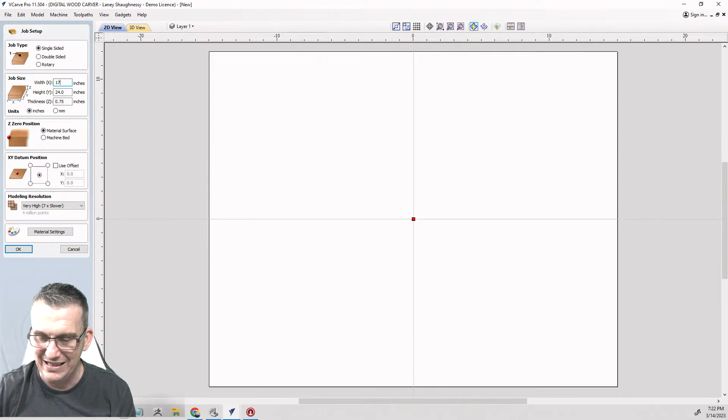Let me get down there—I'm in VCarve Pro tonight. So tonight we're going to create a project. I'm just going to set up a project that's about 17.5 inches wide, 24 inches tall, 3/4 of an inch thick. I'm going to be referencing off the material surface, and I'm going to be starting in the center—usually I start from the bottom left corner, but I'll work from center tonight.

Now when I click OK, I'm going to come in here very quickly, and let's say we have this—let's say we have... bear with me just a moment.

So the first thing I want to do is take these two objects and this object and center them, align them up and down. Oops, let's try that again—hold the shift key when selecting more than one object, get those centered up and down. I want to get this object centered with this up and down, and then weld those two shapes together, and let's weld that together as well. All right, so very rough drawing here.

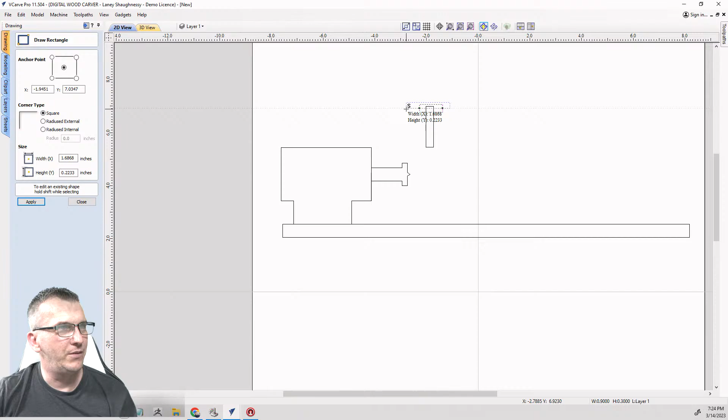But let's say that your router—let me do this. Here's our bit inside of a collet, inside of a router. Close that, pull that up, select all three, align left to right, center, and group. All right, you don't need that—we'll talk about drawing and stuff here in just a moment, but let me just say this.

Let's say the bit here—if I get this bit perfectly aligned with my center point and zero out my Z there, whether I'm coming in from the side or the top, wherever your router's positioned—if I get that tip of the bit referenced with that live center before I put a piece of stock in, then if I have a particular place I can touch off that's a relative distance from that, in this case we'd want to be in the up position, touching somewhere up here.

So if I was coming in from the top, if I come over and touch off on this position here, that vertical distance from this point to this point, that is my offset.

When I'm touching off on my fixed point, it might be tough to have the bit touch off to the outside of the live center if your stock is quite wide. We can do up to 8-inch diameter stock, and a lot of your bits aren't that long, so reaching that live center to program in that distance from that point to that center, that radius, if you will.

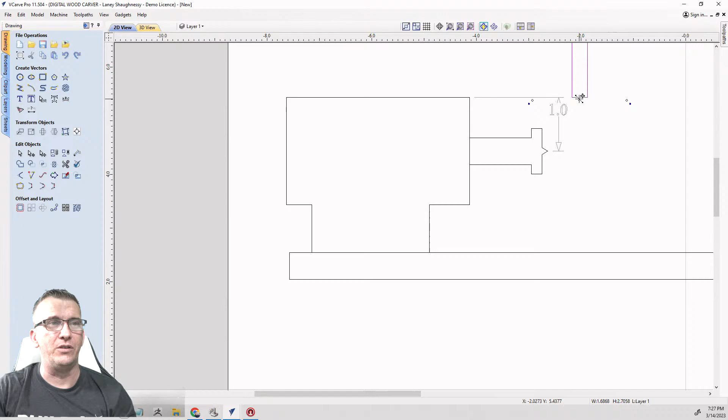So that way, if I were to take my Z over to a clear spot and type in Z0 to move that to the 0 position, I would come down to that 0 position, and then I would be in line with that tip.

Hopefully that little illustration helped out a little bit. All right, let's get back over here and get rid of that. And the same thing if you're coming into the side.

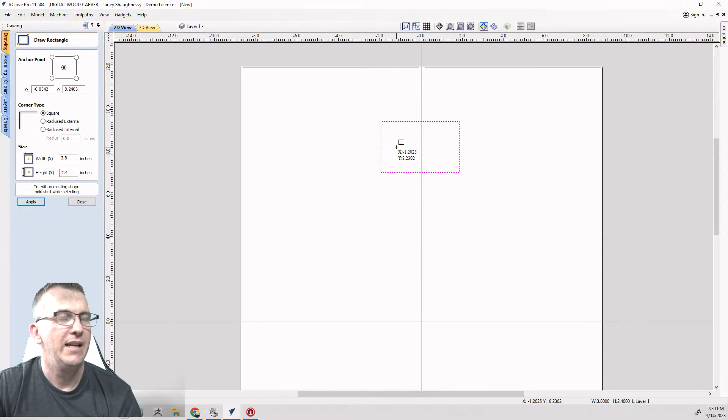So let's get started with the most decorative part of the design at the top of the frame, in this general area here. That square has nothing to do with anything right now, but there's going to be a lotus flower—just a 2D kind of lotus flower. So that's what we're going to start off with, and then we'll build around that. And then we'll pause and take questions and stuff like that as well.

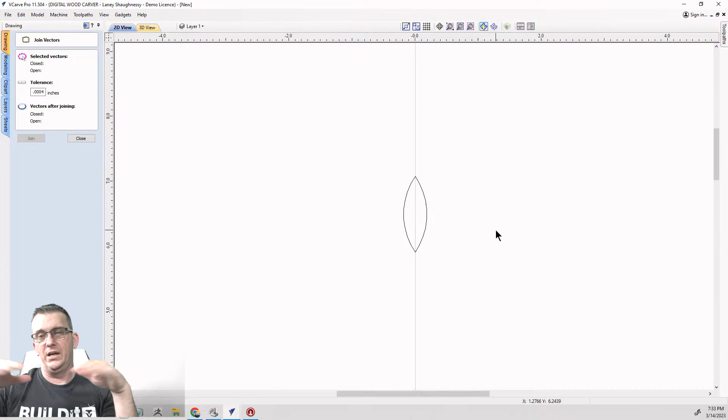Transformational matrix is great for sign makers and stuff, especially vinyl cutters. If I have a metal backboard with some vinyl on there, and I have some reference points, I can bring my camera over on my CNC and identify those reference points, turn on transformational matrix, and it'll adjust the design to those reference points, just like a vinyl cutter. So I can carve out that sign perfectly around that vinyl sticker with transformational matrix.

Warp, if you're probing, you can warp the design onto and carve on twisted, bowed, curved projects, uneven surfaces. Skateboards are a great reference of warping. People who make custom skateboards have curves on their sides, and you need those carvings to follow those curves, so you can probe those points out and warp them. There's a lot of stuff packed inside Planet CNC TNG.

As far as the digital wood carver customers, I don't know anyone using it to its fullest ability. But hey, if you want to be a pioneer and be the first, go for it.

Brooks Martin, yes, it's usable on all CNCs. Planet CNC software comes with a control board, so you would take out your current control board and install this one. Hook up all your axes, limit switches, and all that stuff and controls to that control board, and your inputs and outputs. Then you can run Planet CNC.

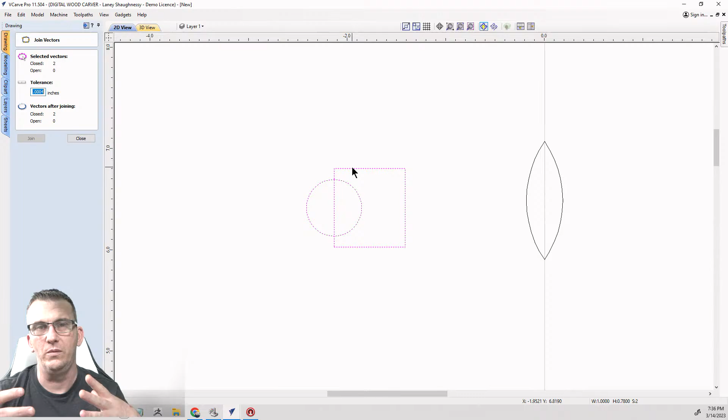There's no way to physically join with the join tool. I have to join by using one of the other options for trimming, to trim and everything. So my weld tool, on the other hand, takes two parts, gets rid of all the center stuff, and just keeps the outside of the shape.

So if I weld those two parts, that's the weld, right? It gets rid of all the center. It's just like welding two pieces of metal together to create a brand new shape, a brand new part. So we have two shapes that when we weld them together creates this one new shape.

Now joining is not going to let me join two shapes together. Joining is mostly used for when I have a vector. Let's go to node editing, and I cut this vector, and I have a vector that's open. Whether that vector is open with the nodes close together, further apart, or whatever, I've got my join tools.

I can join or close this by bringing the two endpoints to a common point of intersection. So that would look something like this, which distorts the rectangle, right? It brings the two points together to a common point of intersection. I could join these two parts with a smooth curve. So instead of a straight line like it should be, it joins with a smooth curve and closes that off.

Or I could join this with a straight line. So this shape here on the board, if I join it with a straight line, of course, that's going to join and close it with a straight line.

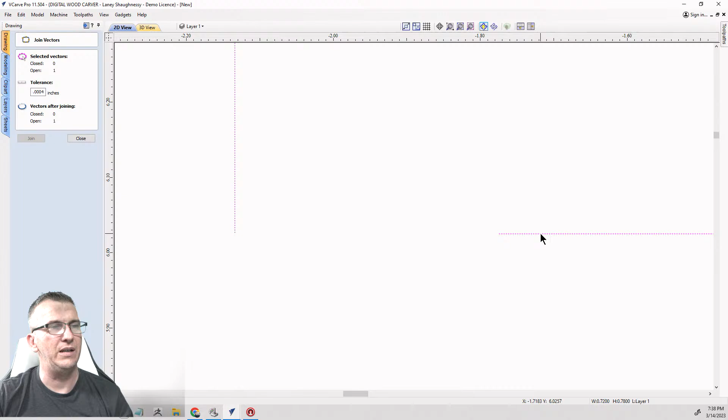If I am using the join tool here, my tolerance, my nodes and everything, they have to be well within my tolerance range. If I am here within this range, that's still too wide because I need to be within 0.0004 of an inch. If my lines were just cut but the nodes were kind of on top of each other, I could come in with the join tool, and that will allow me to join or close. Now I could change my tolerance, make it larger, but then that's going to distort my design. So 0.0004 is where you want to be.

And if I just cut this vector with node editing right there, not in the center, but right there, so this looks like it's together, but it's an open vector, okay? The vector is open, but I can join, because within my tolerance, that open vector, I can click the join button and close that. That's joining.

Now, where most people get confused is the difference between joining and grouping, not joining and welding, because that's two completely different beasts. When we're welding two parts, we're taking two shapes and creating one. But if I were to group these objects together, that means when I click on them, they are being treated in the software as one item.

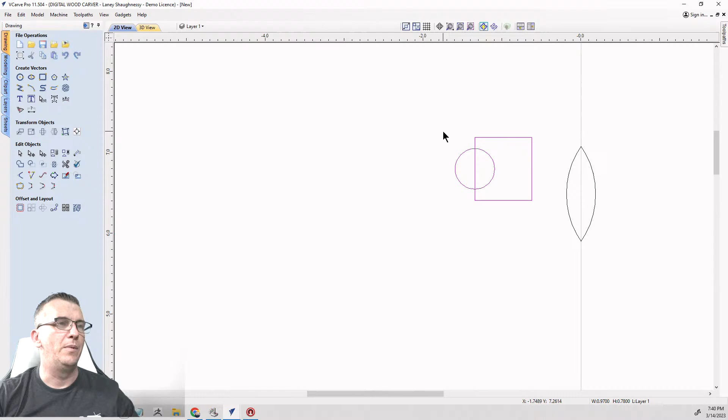But if I were to join them, I could use my scissor tools, right, let me get them ungrouped. If I were to join them, like welding, I could trim those together in one direction or the other, doesn't matter. But grouping doesn't join, welding doesn't join, join joins. Join is for taking an open vector and closing those nodes up, joining them together to create a closed vector.

So hopefully that was clear. I hope that answers your question. It was a confusing answer, but hopefully it was a good one.

All right, let's talk about our lotus leaf here. Here's what we got to do. So the first thing that we're going to do is we need to create the petals for this lotus leaf. And we have to determine how far apart the spacing we want for the next petal, the next petal, kind of thing.

And I think what I'm going to do here is I'm going to do an offset. I'm going to go outward, and I'm going to offset a distance of 1/8 of an inch, and create... all right, 1/8 is too much for this. Let's go with 0.06 instead.

Oh, that was 0.6. Hold on a second, ladies and gentlemen. I can't type tonight.

0.0625. Here we go. All right, perfect. Okay, actually I want to go closer, I want to go 0.04. Control Z to undo, we're going to settle on 0.04. Beautiful, that looks good to me, because I want my petals to still be somewhat close.

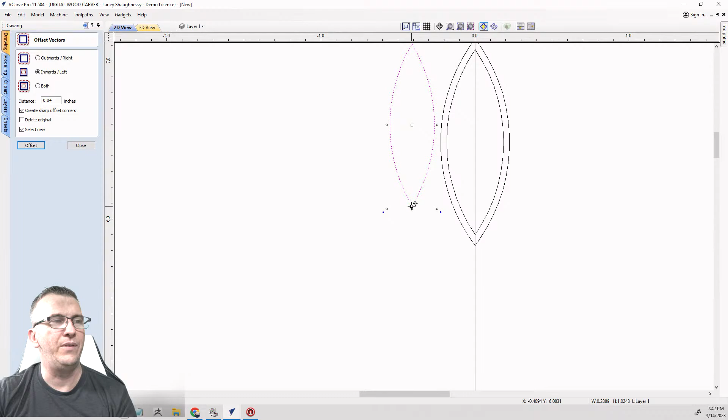But I'm also going to offset inward that 0.04 as well. Now that inward vector, I'm going to take it, and the end of that vector is going to come right about here, just a little up from the bottom. It can be anywhere, but it's on the offset. I'm on the offset vector, and I'm deciding to choose, I'm picking just a little bit above the tip of my original...

Part. My original piece is this piece. I'm just going a little bit higher. But I want this point, I want to grab this point and snap it to that offset. And then, if you single click when you're double clicked on an object, let me show you this.

Let's say I have this rectangle here. When I double click on any object, it puts it in transform mode. Transform mode means I can move, size, rotate, mirror copy, and all that stuff.

Now, that middle square is not just for moving things around, grabbing and moving, because to move an object you have to either grab it on the pink line somewhere or the middle square. But if you single click on that middle square, that is also the pivot point. By default, all parts rotate on themselves when they're rotating, and the pivot point can be moved, so I can single click on that square and it'll show the pivot point. And then I can drag that pivot point anywhere I want to, so that I'm rotating off that pivot point. Okay?

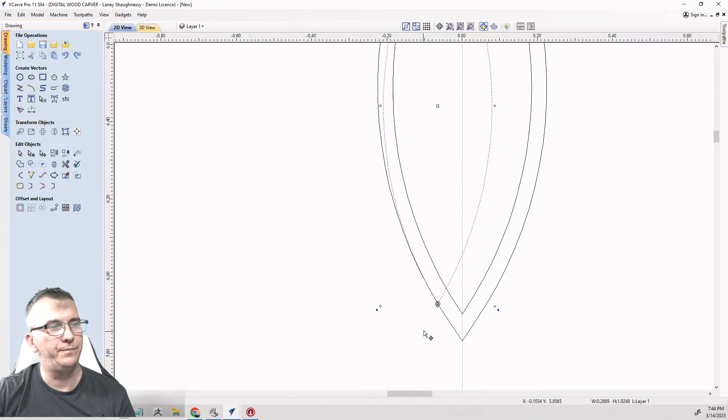So what we're going to do with our lotus petal here is, let me get rid of that, on this offset that we moved over here and kissed up to that edge, I'm going to double click on it to put it in transform mode, and single click on that center point to get the pivot point. Then I'm going to drag that pivot point down to the point here. I want to be down on that point, because I want to pivot off that point, and I'm going to grab this blue corner box here, and I want to rotate out.

And when I rotate out, I want this edge of the lotus to touch the edge of my original part. So I want to come over and bring that out to just about there. I want that touching, kind of close enough.

I want that touching. All right, now I'm going to take that petal and mirror copy it. Flipping, create a mirrored copy, flip about job center is also checked, and I want to flip horizontally to create the other side.

All right, and then I'm going to take both of these objects here, and I'm going to offset them outward by that 0.04. That 0.04 is going to stay consistent throughout. I'm going to go outward, but I should go both directions - I should just choose both directions next time, but I'm going to go inward as well too. The next one I'll do both directions because I want to do that offset inward and outward.

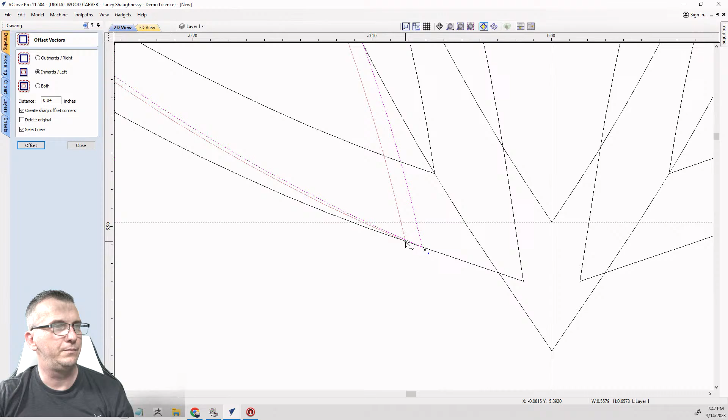This is my original part right here. I'm coming back down a little bit, and I'm actually going to be lower than my original part. I don't really want to be that low though. Let me put a line there. I want to be lower, but not that low, so let's come up just a little bit. There, okay, and pull that up.

We're going to take this and once again click on the pivot point at the center, drag it down to that point at the bottom, and then we're going to rotate this out. I want this shape touching my second petal, that petal there. Let me get back over there, and I want to rotate just a little bit more.

Okay, and then I'm going to take that object and mirror it to the other side. Okay, we're going to stop there for a minute so we can answer another question.

Brooks Martin asked, Laney, does VCarve or Aspire have a way to equally divide a vector into 5 equal segments? So I'll show you my approach, Brooks, and then you can kind of go from there.

So if we do a line, then I'll also do a rectangle and show you kind of the two ways I would do it. Let's say I have a line here, and let's say I have a line here. And let's say that I take that line and hold down the control key, and I'm going to just drag out 5 copies of that line, right?

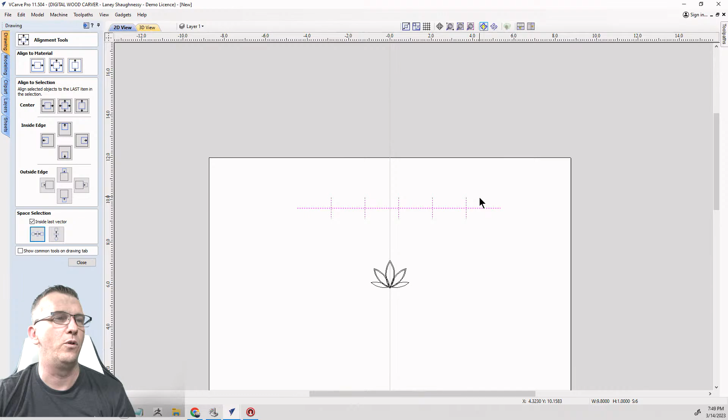If I wanted to separate into 5 segments, then I would only use 4 lines, right? So I could take those 4 lines, select them first, this line last, center, and then space equal distance to create my 5 individual segments, right? And then if I needed to cut them, I could cut them on those lines. So that's one way if it was a single kind of vector thing and you needed to divide it up into sections.

Now let's do it as a shape. Let's say that I have a rectangle here. And on this rectangle, the size of this rectangle is... let me stretch this out so everybody can see. All right, let's size this up. I'm going to go 17 by, we'll go 2.5. Just a random number, nothing major. 17.5. I want to kind of be the same size as my board. There we go, all right.

So let's say that I wanted this 17.5 of my board divided into 5 sections, right? I could come into the rectangle tool here and take my width, and I'm either going to use the number if it's not the same width as my board, but if it is the same width as my board, then I'm going to use the letter W or the letter X. So in this case, I'll use the letter W, and I'm going to divide that by 5 and hit equals, and that gives me a 3.5 inch.

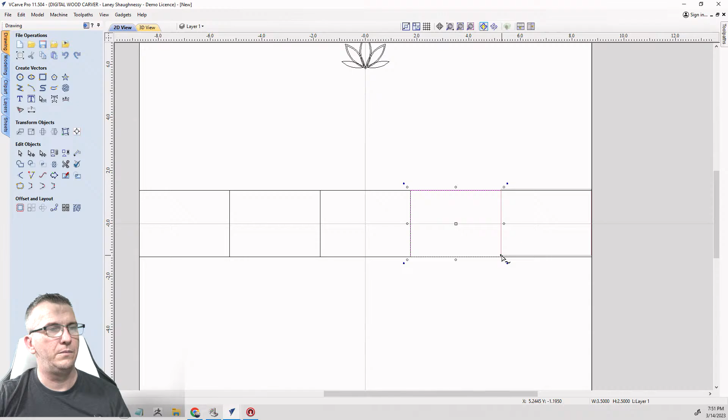Now I'm going to go ahead and come over here and just click this. And basically what I have just created is 1/5 of this rectangle. So if I hold down the control key, I can drag out copies and snap my second one into place. My third one, snap it, get my snapping tool working on me. My fourth one, and my 5th one. Let me get everything snapped together. There we go, and so I could divide it up that way as well too.

So that would be, Brooks Martin, that would be kind of the ways that I would equally divide a vector into however many sections I would need. That's the 2 ways, my 2 approaches.

So now, again, if this rectangle was not the same width as my board, let's say it was in here, still, it doesn't matter. I'm going to be creating a rectangle that's the size of my board, which in this case is 10.4544, whatever. I'm going to divide that by 5, hit equals, and then I'm going to click to create that 1/5 of that segment.

And then I'm going to just hold down the control key and just, 1, 2, 3, 4, 5. And again, I'll take all those and line them up and down so they're all lined. But that would be a way that I would do that.

JR asks: does Planet CNC support automation and importing variable tags, like designing a 10 inch by 3 1/4 inch circle, and can I run a macro subroutine Excel file too? I have no clue, JR. You'll have to research Planet CNC on that one. I don't even know why Excel would play a role in anything, but I'm sure that's a Mach 3 thing, or something other controllers do, some old school way of writing a macro. You'd have to research planet-cnc.com. I don't have a way to answer that at all. I'm not even going to attempt it. It's a good question, but a little over my head.

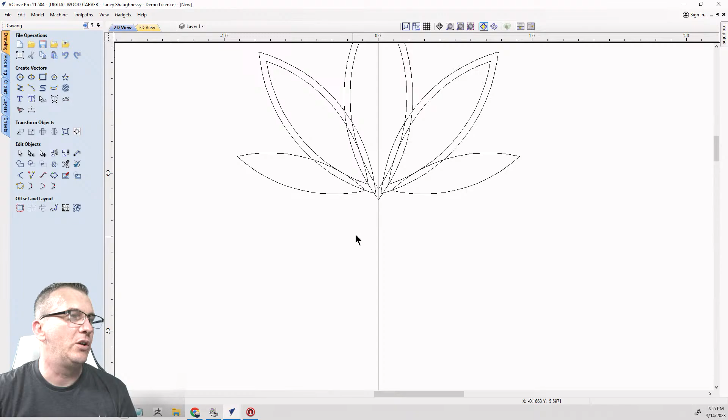We had just mirrored our two parts over, and now we're going to offset those like before, outward and inward in both directions. We'll use that time to go ahead and create those two shapes again. I'll take the right one, since I'm going to mirror it over when I get into position, so I'll delete the right one. On the left one, I'm going to bring down the offset, and I want it to be somewhat close to in line with the other part here.

This time, on this last petal, when I create the mirrored copy and rotate it, I'm going to rotate it almost straight across. I want it straight across, pretty much like that, and I'll be happier if I can bring this side down and snap it to that outside edge.

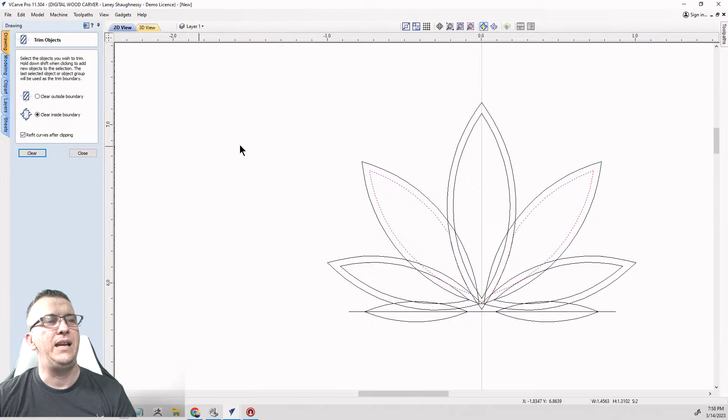That's going to be my boundary, and I'm going to use the regular trim tool, and I want to trim clearing inside the boundary. So we're going to get rid of that. And then once I've done that, I can delete that boundary. So we'll delete that boundary.

Now, next petals. Down here, we'll select these two, group them together, G for group. We're going to select the two offsets, G for group, so two separate groups. Let me see if I grouped the right ones. I did. We're going to select our petal group here, hold down the shift key, select our offset group last, and clear inside the boundary. Once we've done that, we can then delete that group.

And then finally, we're going to take this shape here and this shape here. We're going to group those together. Select our two offsets. Group them together. And they don't necessarily need to be grouped because they are together as one.

So we will select our first group here, select our outside offsets and trim, clearing inside the boundary. And then once we've done that, we're going to take our scissors and, well, first of all, let's get rid of the offset. Okay. Then we're going to take our scissors and we're going to trim away our line at the top here and the bottom. Okay, just like that. And that will be our lotus flower.

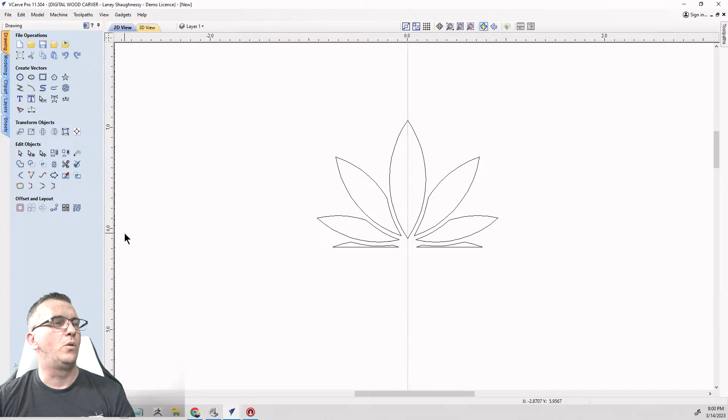And then we're going to take and offset that entire flower to create just a big boundary around it. And I think I'm going to offset it outward. I think I'm going to go 1/4 of an inch, or let me see what 1/4 of an inch looks like because it's kind of small. 1/4 of an inch is way too much. That is not what we're doing. Let's go with a 0.125. Let's see here.

Nope. All right, turn off sharp corners. We don't want sharp corners. I kept seeing what are those points. We're going to go a 0.8... 0.08. Laney, learn how to type tonight. There we go. Offset. Perfect. 0.08. That'll be our offset.

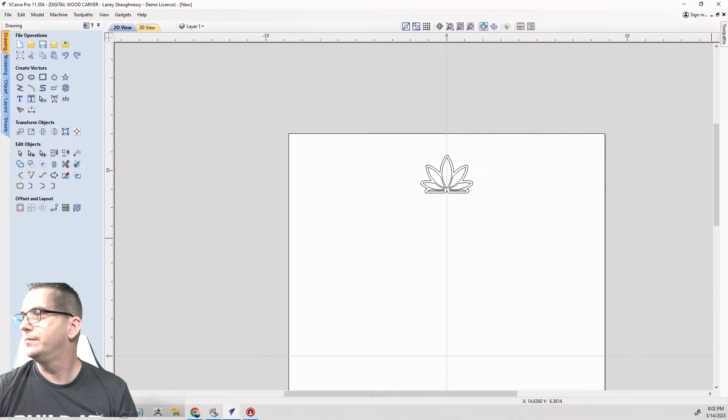Let's close that. So now we have our lotus flower here. And I'm going to go ahead and drag that up to the top here. Okay. And that's going to be kind of an accent piece at the top. We'll size it up. We'll go a little bit bigger. Not much, but though. Size it up. And we're going to create a mirror copy all the way around, so we don't need to do anything with that anymore from there. All right. Bear with me a second.

All right. Now, the next thing that we're going to do is we're going to now kind of start out with a rectangle, if you will. And I always, a lot of my shapes, just so you know, and you'll see this if you ever watched my class video... I think it was live. But how to draw a Maltese cross. That uses guidelines and rectangles to create this Maltese firefighter cross and everything from just those rectangles and other shapes. But if you ever see that, you'll kind of see my approach and stuff.

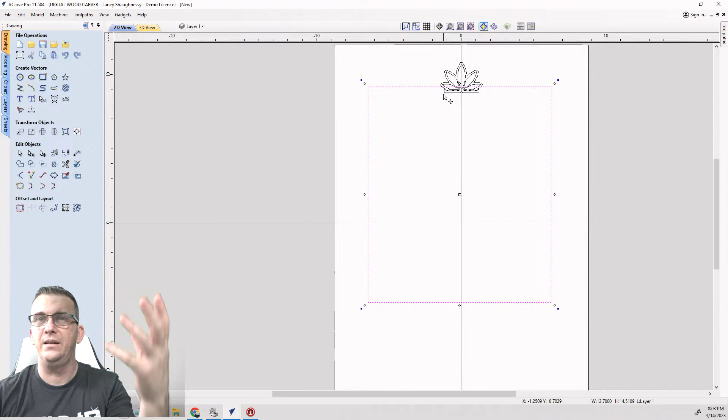But this time, what I'm going to do is I'm going to draw kind of a full rectangle, almost like it's my full frame. Now, mind you, I'm only going to be focusing kind of on that top left quadrant. I don't really care what's on the right side or any of that stuff. I'm kind of going to be focusing my attention here. And in this case, the center of my board is going to be my center point, if you will. So anything below that center line, I'm not paying attention to it either. So basically from that center line up is my focus point, my focal point and everything. Okay, so what I want to do is let's go ahead and let's bring this out some.

I want to make sure it's centered left to right. So I'll go to the alignment tool and align to material, left to right. And I'm going to go right into node editing mode here on this.

What I'm looking for is I want to create kind of an S curve, a nice French curve, if you will. This Victorian frame is what we're ending up making, but I want this kind of French curve shape to it.

So I'd like to go into node editing, and the first thing I want to do is go with a fillet first. I'm going to go with a large fillet, like a 2-inch normal fillet, and round that over. Actually, I want to go bigger than that. Let's try that. Okay, that'll work.

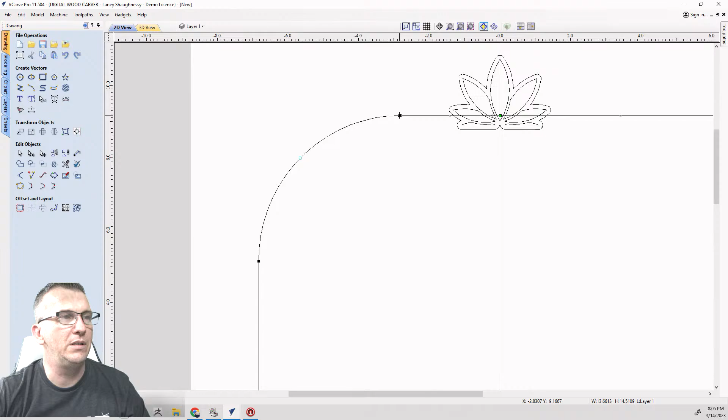I just want to go from point A to B for right now. I'm going to delete this point, and you can see I'm getting more of a curve here because it's still an arc.

I'm going to change it to a Bezier curve now, and this will let me manipulate this curve a little bit to really flow it out.

And I want to create a cut on the vector right here. That's not quite my center line. Let's get it right on the center line here.

Okay, and now that I have this Bezier curve, I need to get rid of this point. So again, point A to B, let's delete that point.

Now I have this curve that I can work with, and I can really start to create the shape. Now I want this anchor point here that I cut. I'm going to use the down arrow. I'm a big fan of using, instead of the mouse, the down arrows, up arrows, left and right.

I want to pull this down to right about here, and there's going to be kind of a cutoff point over here, but this will be good. I want to pull this arc, and I don't care right now about it crossing over the lotus, because again, there's going to be a cutoff point in just a moment.

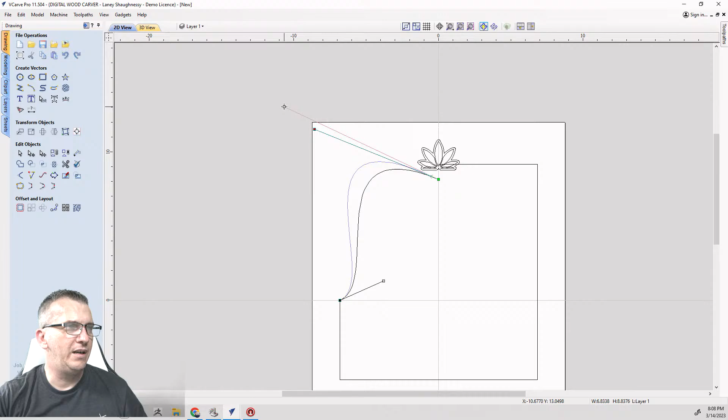And then I want it to kind of S around to about like this. All right, so on this shape.

And then what I want to do is offset that. So I want to offset outward.

Very important, so you know this: imagine this star is you. That star is you, and you imagine you are looking at this line right here. That start point, wherever your start point is, imagine you are looking at that start point. Your left and your right is the same as the left side of the line or the right side of the line, inside or outside. So if you are here staring at this starting point, this is the left side of the line, this is the right side of the line. This is the left, inside. This is the right, outside.

Now, if I took and put you here, right, and you were looking at the start point here, this is your left, this is your right. Right, left, right?

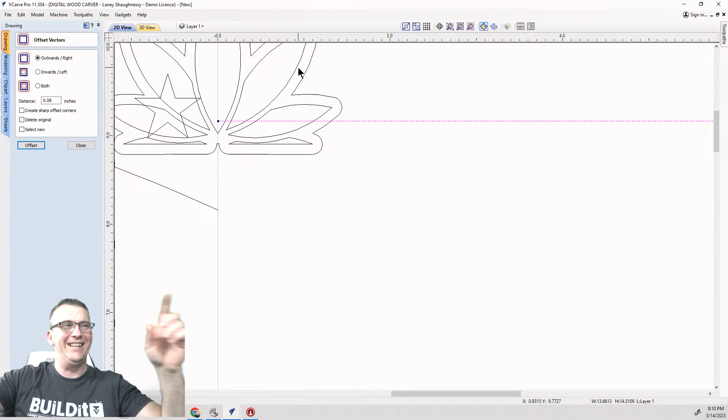So if I'm looking at the line in front of me here, the start point, my left, my right - this would be the right outside, this would be the left inside. Even though you think no matter how I look at it, that's still the outside, right? No, it's just where the start point is.

So if I were to offset this line outside right, it's going to create that new line here. Let me do select new so you can see, and I'll go bigger, 0.125. Offset outside right, it's offsetting inward.

So inside left goes outward because of where the start point is. Now, if my start point would have been at the end here, then it would have been correct - outside right, inside left. Because if my start point would have been down there, remember, it's wherever you're standing looking at that line. If this is the start point, make start point, delete that, delete this - that's the start point. Now if I go offset outside right, it's going to go outward like it's supposed to, and then inside left, because that's your left, this is your right if you're standing there looking at the line.

A lot of people get confused on that, and I just want to make sure that you don't, okay? All right, so hopefully that was helpful.

Who knows? Who knows? All right, Kool-Aid. Thanks, bro. Man, I appreciate you, buddy. Thank you, Kool-Aid. Get some Kool-Aid. Awesome.

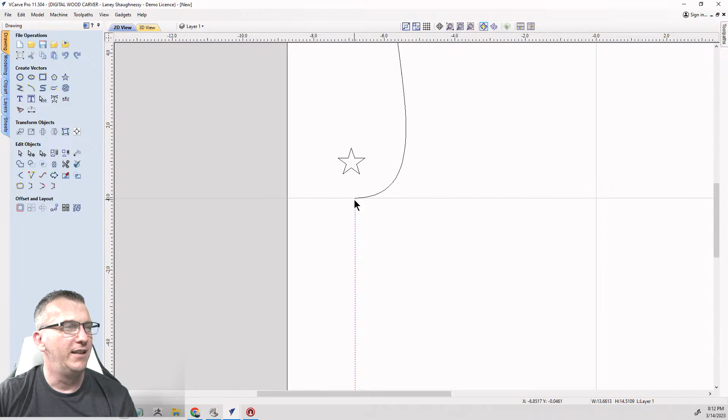Those super chats keep coming in. Where we going? If each one of my subscribers donated $1, we'd be somewhere.

All right, let's see here. Let's get rid of the star, that's not part of the design. So this shape here, I want to offset it. And my start point is here, so I want to offset to the right outside.

And I'm going to offset outside, and I'm going to go about a 1/4 inch, let me see what that looks like. Yep, 1/4 inch is good. We're going to go 1/4 inch. Let's go a little bit more, control Z, 3/8. Let's go 3/8. Now, 0.375. And again, there's going to be a cutoff point here in just a moment.

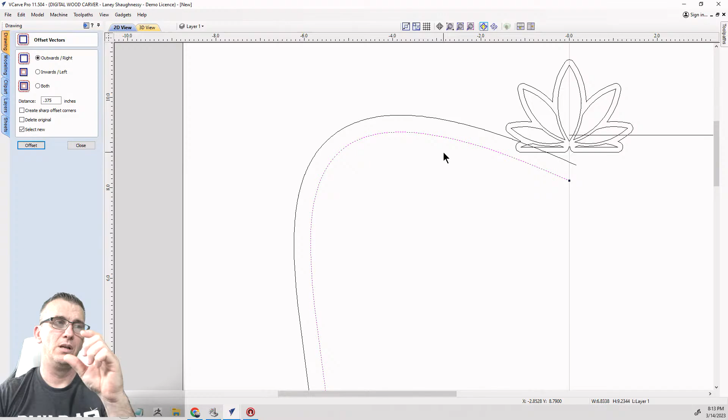Now, the next offset that I do is I'm going to do an offset of this line here a certain amount, and it's going to be wider. And then I'm going to do an offset of this line going the outside way, and it's going to be closer. So let's do this one first, the inside.

So we're going to go, and again, if we look at the node editing on this line, the start point is eluding me. What is the start point? Let me delete that. All right, so the start point is still this line right there, that's still that green line. It's still that one. And if you look at the arrow, can you see that? It's hard to see on the screen, but if you ever look next to the node at the beginning or the end of the line, there'll be an arrowhead, and that arrow points to the direction the line is traveling, start to end. Okay, so this is my start point.

So again, on that one, I need to offset inward, and this one's going to be a wider offset. I'm going to probably go 3/8 inward. Okay, I'm going to probably go 3/8 inward - no, I'm going to actually go more. I'm going to go offset inward, I'm going to go half, we'll just increment it up, 0.5.

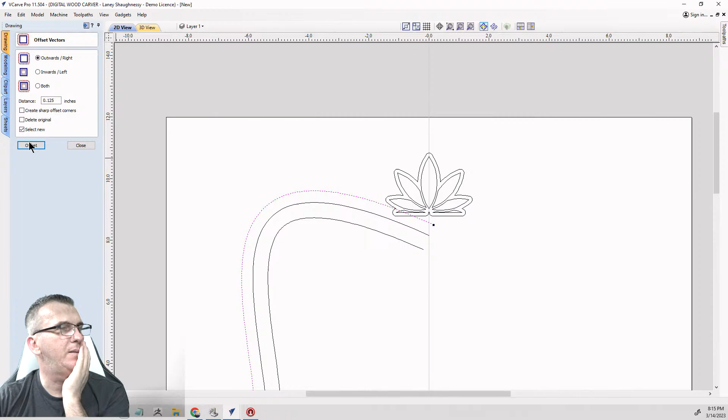Yeah, I'm happy with that. Okay, I'm good with that.

Now we're going to take the rectangle tool, and on my offsets, let's pick a spot anywhere. Let's go here, and I'll center it up in just a moment. With this rectangle, let me get it centered, align left to right on the material, and let's bring this in to right there. I want this edge to be touching right there on that bottom line.

That's good. Now, on this, the outside offset of the lotus and this line here, let me bring this out just a little bit past that line. They're going to kind of all be welded or trimmed together in just a moment, but before we do that, let's get some of this cleaned up so you can start getting a better visual.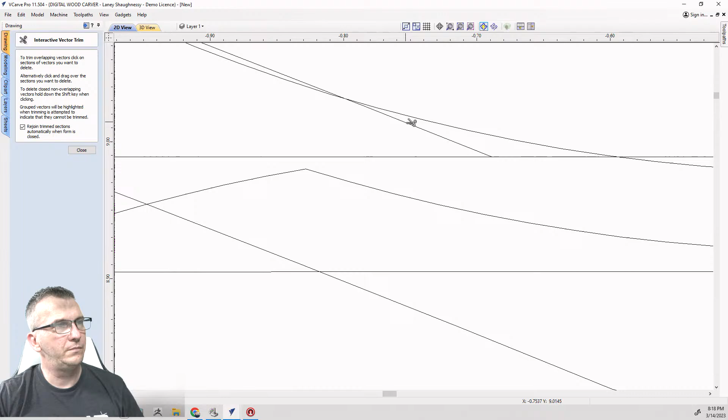So what I'm going to do is take the scissors, and this arc right here, I'm going to trim away that arc, get rid of it, all the little pieces of it. Okay, and then I'm going to trim away this part of that border where the lotus connects right there.

I'm not going to trim anymore right now at this time. I'm going to leave that be, because eventually, in just a moment, I'm going to be drawing a line and cutting everything in half, because remember, we're only doing one quadrant.

Now, from here, I can go ahead and trim that line away. I don't need that anymore either. All right, good. Now, this rectangle, let's bring that down to right about there.

What I want to do, ouch, got something biting me. What I want to do is on the rectangle, the two sides are going to be gone, and I'm only going to have the top and bottom lines. The top line is really going to be, let me bring this up here, just nothing.

Basically, hell, I'm probably just better off. Let me just draw a line, and let's get rid of the rectangle. I'm just going to draw a line because we're going to be getting rid of the two sides and the top. So what does that leave? Just the bottom, right? So let's pick a spot right over here.

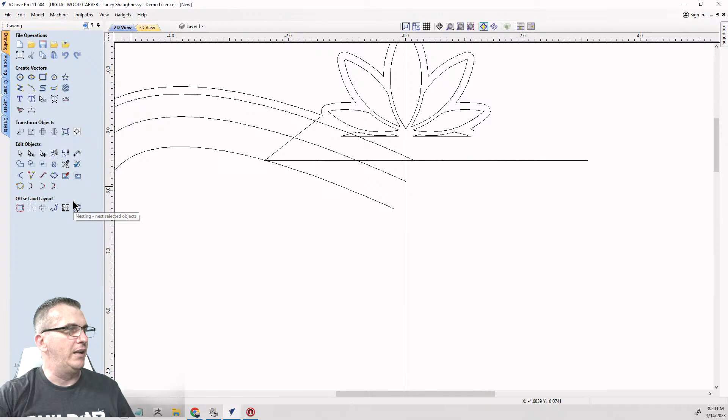And what I want to do is imagine, if you will, that there's a virtual line, and I can draw it actually in there. Let's just draw, we'll trim a line from here to this point, there to there. Now, that line, I'll use it as a trimming line. I'm going to trim here, here, here, and there.

Yep, that's good. And then I can get rid of that little segment. So basically, it's been used right now just to trim this off, and then I can now trim this to there. So there is, so far, kind of the frame or where we're at.

All right. Now, on this, I'm actually going to change the curvature just a little bit. I'm going to kind of manipulate it with node editing. And, no, I'm not. I'm going to... No, I'm good with that.

I'm going to draw another rectangle. This time it's going to be a very thin rectangle. There's going to be a top and a bottom, and we're going to kind of overlap this. The height of it really doesn't matter to me; I just want a nice thin line, right under these kind of flat petals of this lotus.

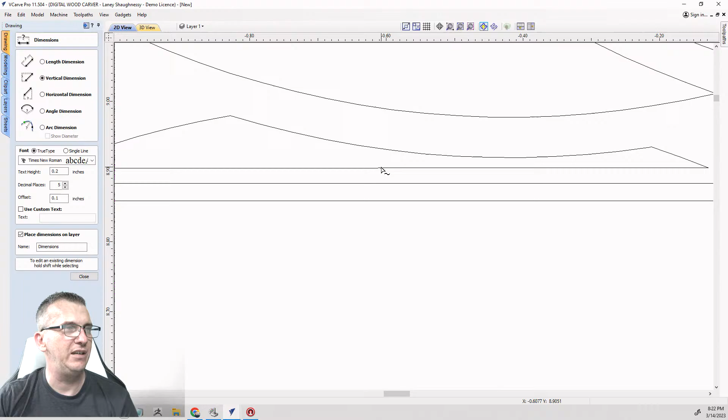I'm going to measure from here to here vertically, and I'm about 0.02193. Well, if I were to measure up here, okay, I'm at 0.04305.

So if I take this object right here and move it relative on the y, up and down, if I take the distance I'm at right now, 0.04305, and subtract what I want to be at, minus 0.02193, and hit equals, that's the distance I need to move. But I need to move down, so it's got to be a negative number, so I'll put a minus sign in front, and then click apply to bump that down.

So now, when I measure from here to here, I'm at that 0.02193, right? You take your current distance that you're at minus what you're trying to achieve. That distance you have to move will get you to your goal.

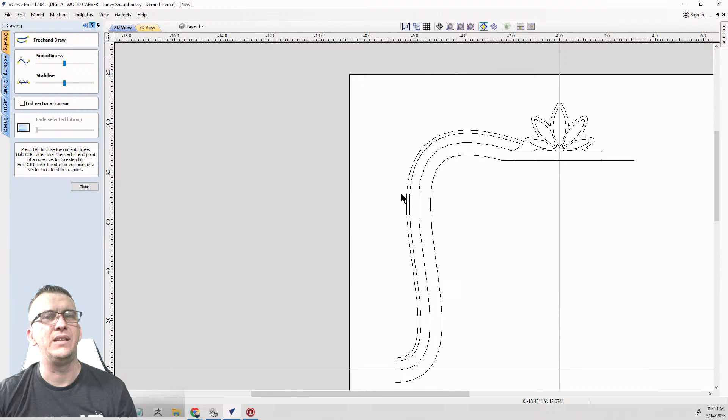So any of your tools or toolpath operations, you can click on the tool and click Get Help on this, and it will open the manual. My manual keeps opening on the other screen, but it'll open straight to the page of that tool. It's a one-page read, so you don't have to read a whole book just to learn how to use a tool, but it'll take you there.

Now, anything outside of that, if you go to Help Contents, which is the front page of the manual, scroll down and you will see all of the menus that you see in your software, and those menus are interactive. You can click on a tool in the menus to get taken straight to the page. If what you're looking for is anything other than the tools, something more how-to related, then look in the video tutorial browser, because the manual covers the interface, getting started, layers, clip art, tool paths - that's your table of contents - and pre-installed gadgets, modules, and menus.

So your menus are like your file menus and all that stuff, but your table of contents is here. You either want to learn about one of your tools and how to use it by clicking on the tool to get taken to the page about that tool, or you're going to use the interactive manual on the left, the table of contents and stuff.

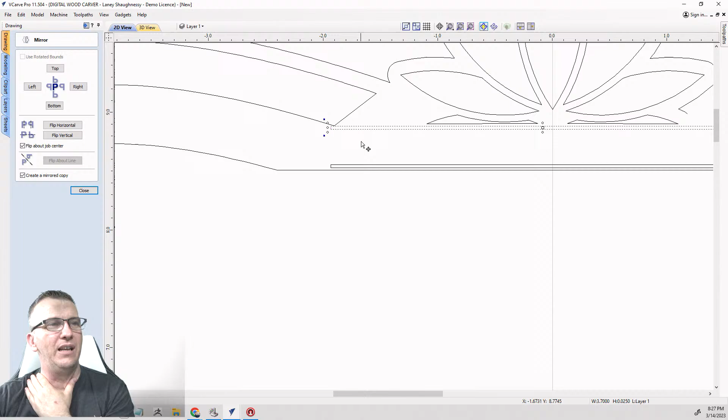How you doing, buddy? The next thing we want to do is, now that we have these two rectangles created, I want to create almost like a dental tooth pattern, a dental tooth trim - I think that's what they call it. I want to create a little rectangle, probably about 0.075 inches wide by 0.16. Let's go to the size tool.

I want to go 1.875. There we go. 0.075 is a good width.

Now I want to create an array of these. I'm going to use the array tool, and I just want one row, and 20 columns. I want a gap in between of about, on the X, a 32nd.

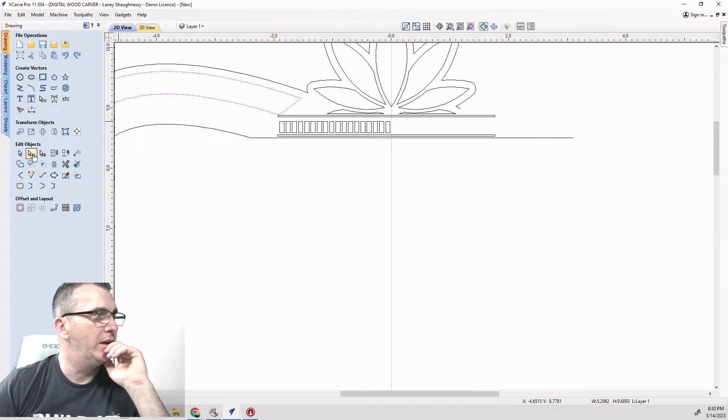Now I want to take this line, or this shape here. I'm sorry, I don't want to draw a line. I want to go into node editing, and temporarily I want to cut the vector right here, on the corner, this lower corner. So I can use my extend tool - when I point my extend tool on this bottom line, it's going to show where this line would extend to, right?

And the, I'd like, what would I like? I'd like it if I had more of an arc here. I'm going to change this arc now in node editing really quickly. You see all those nodes? I'm going to redraw that curve. I'm going to fit arcs to a curve, and I want a Bezier curve, and I'm going to change my tolerance, and get rid of all those node points.

Okay, and it distorted my shape and all, but that's fine. I'm fine with that because I'm going to redraw that inner shape because I want to actually kind of delete this span there, and I want this curve to be more dramatic. I want it to be on the inside here. I don't care if I'm close and wide, that's fine. But I want this more pointing kind of down. And...

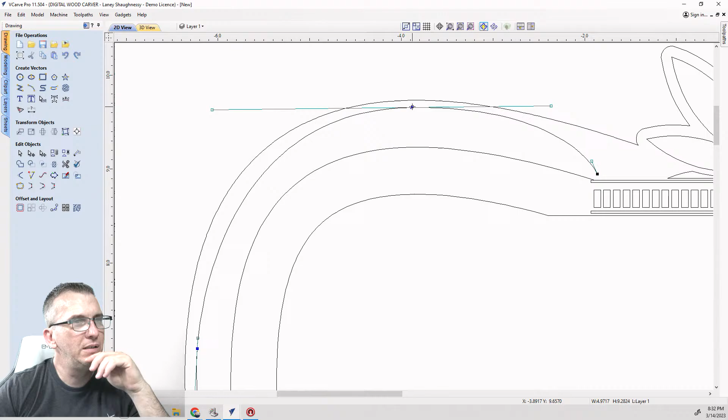I'll bring this up. Again, on this curve here, I'm going to cut the vector for a minute on the lotus. Cut the vector. And I'm going to take this curve and redraw it. That's the curve fit tool. I'm going to redraw it to get rid of all those points and everything, and I can recreate the shape.

Let's do, since we're at it, let's do the inside here as well too. First of all, cut the vector on this corner. But all those nodes, I'll redraw that one as well. Okay, and I'll manipulate these.

Now I'm going to just be a little bit more manipulative here. And this inside one, I can go ahead and delete it because whatever I do with this one, I'm going to offset it. I'd like this one to have - let's go to node editing - I'd like a more dramatic kind of curve down to these kind of dental teeth here. And...

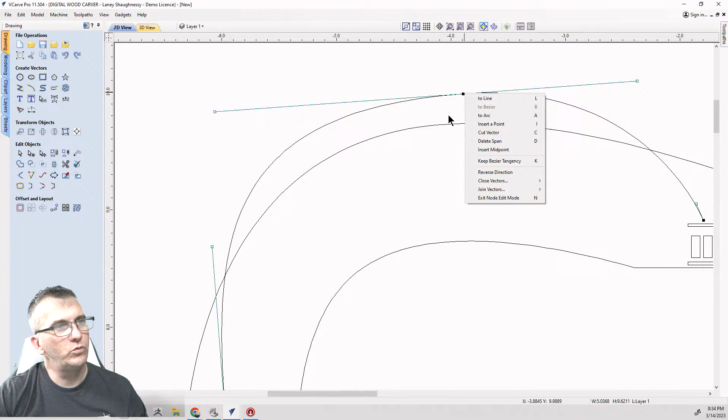Let's pull this in. And let's pull this back. All right, higher, higher, higher. Come on now, let's get rid of that point. It's going to fight with me. There we go. All right, now I can control this a little bit better.

There we go. All right, from there, let me redo this really quickly. We're going to offset inward one more time. I just wanted more of a dramatic curve. We're going to offset inward 3/8 of an inch. Come on.

And I want select new selected, and we're going to create that, and we're going to do it again. Okay. And then we're going to take this and offset. Let's get rid of this. Offset this outward, 1/8 of an inch. Nope, wrong direction - outward, it's inward now. There we go. All right.

On this lotus flower, here to here, I'm just going to do a nice kind of arc. So this is going to be joined with a smooth curve. Join with a smooth curve. Okay, join with a smooth curve, just to close that off. All right, one more time.

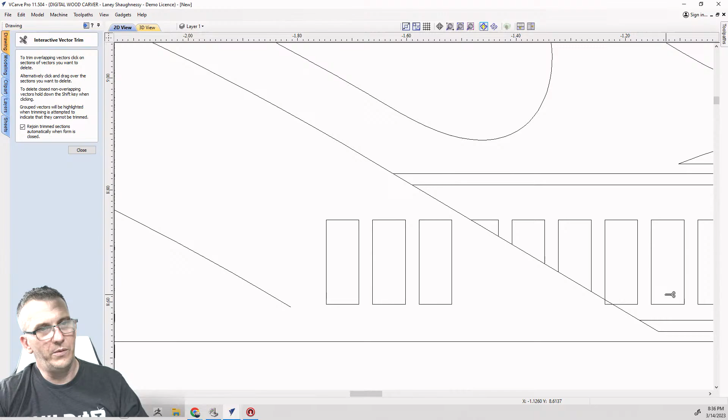Now that I've got the shapes that I want, extend tool - extend this line to here, use our scissors and trim that away. Wonderful. The extend tool, I'm going to extend this line down to here, and then I'm going to trim everything on that side of the line away. So that to that, and that, all the way to there. Okay, get rid of this.

Then I'm going to take this, and I want a 90-degree kind of shot right here. Let me first of all trim this. 90-degree shot - I want to come right straight across from there to there. I'm going to go with a line tool, and I'm going to snap from here to there, space bar.

And then I'm going to take my scissors once again and come in and clean this up. So clean that up, that, and that. Okay, so that's what I want. And that's what I want.

Now I'm going to take these three shapes. This, you see how that's connected together? Can't have that connected together. I'm going to go to node editing mode. And on this corner here, I'm going to cut the vector, because this line should intersect with this line. Okay, so this, I need to cut the vector right there.

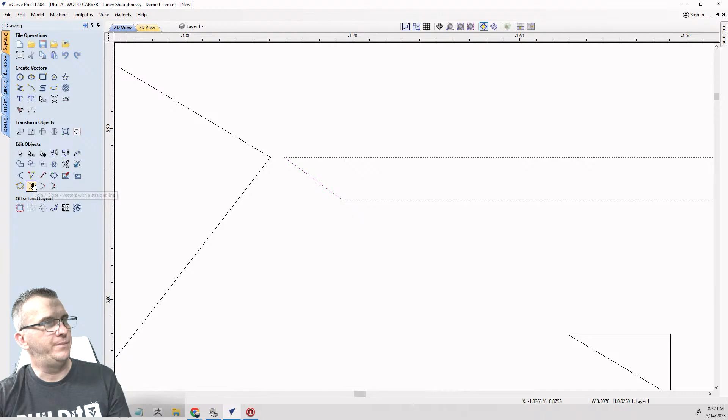I'll redraw that line in just a minute. But I'm going to extend this to there. There we go. I want that finishing off. And then this, I'm just going to join with a straight line. Okay, so that'll be that. And that void, it's purpose. I want it there purposely. Okay.

And the top one here, I'm going to mirror that down because I want the point upward. Bear with me. Draw a line. This will make sense in 2 seconds. I'm going to draw a line right straight across these guys.

We'll just use that line because I'm going to take this object, select that line last, and I'm going to mirror, flipping about the line. Okay, and

Because my line wasn't perfectly centered, neither was my object, so I'll just use my up arrow key and pull that up. And remember,

Let's snap here for a second. I was 0.0239 and some change, 0.0239 and some change. So my distance, if you recall, from the bottom of this lotus petal to the top of this rectangle was 0.2197. That's what I still want that to remain

here from this line, this bottom line. So I'm going to move it up 0.2197. Okay. All right, that's it.

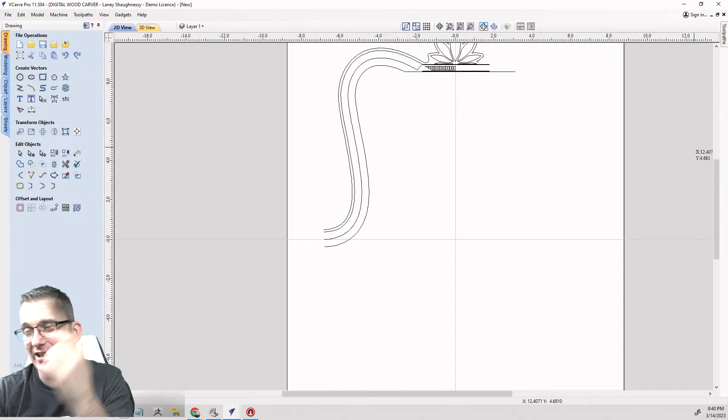I never been happy with offsets because it did all of those points. This is Gold Laney, the greatest Vectric teacher I've ever seen.

So yeah, we have a tool called Curve Fit. Fit curves to selected vectors. And that tool, you can turn those vectors into Bezier curves, into arcs, or into straight lines, and it'll get rid of all those nodes, and it'll minimize them based on your tolerance. Now, if your tolerance is set too high, be careful because it'll distort the shape a little bit. So I could have probably turned my tolerance down a little bit, but it cleans up the vector points and everything.

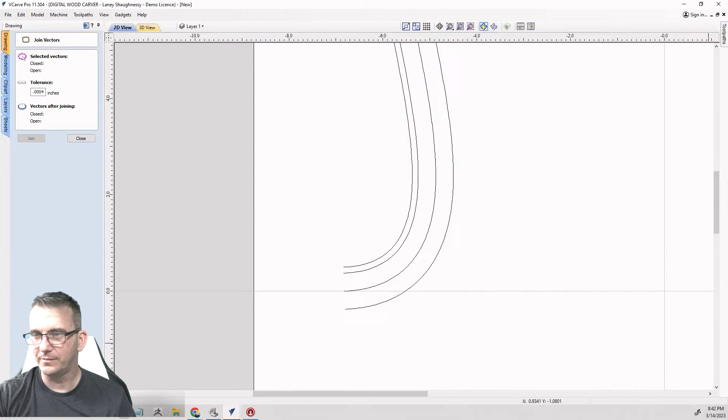All right, so getting back to the drawing here, back to the drawing board. What I'd like to do is, as this arc comes around, I'd like it to start thinning up a little bit and getting a little closer. So I'm going to go into my node editing here, and you see that new arc right there that we created earlier. That's that curve, right, with all those nodes that Jerry was talking about. We're going to do the curve fit tool, and we're going to just do it as a Bezier curve.

That's what I want. We'll click on preview, and now when we go into node editing mode, we're down to those few points, right, and everything.

Now, I want this arc, I want to bring it in closer, and I want it to start getting thinner as it gets here. And then as it starts coming around, I want it to gradually get to the width that it is up here. So as it comes around, I want it to start widening up and everything.

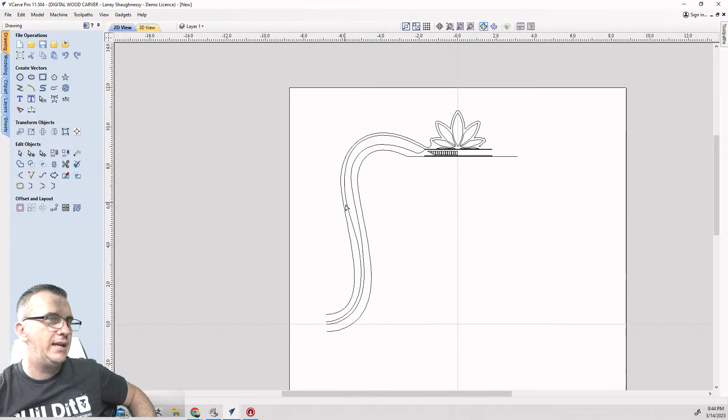I want this curve to kind of start coming around, and I don't want it bottlenecking too quickly. I want it to start thinning out. Okay, I'll be happy with that.

Now this curve here as well, again, I do not want to change the lotus shape at all, so I'm just going to disconnect it. Cut the vector there, basically disconnect it from that lotus outline. And then I'm going to use my curve fit tool.

I'm going to redraw that curve, and then I'll reconnect it, rejoin those two back together as one. Now here, on this, when I did the curve fit tool, it distorted it a little bit, so I want to make sure that I kind of pull it back into shape.

Now this one's going to also kind of follow that suit where it kind of gets more narrow as it starts approaching.

And this one, again, cut the vector here. I have to do this a second time - you're like, didn't you already do that earlier? But if you remember, I deleted all those lines and redrew them, re-offset them and stuff, and it did that again.

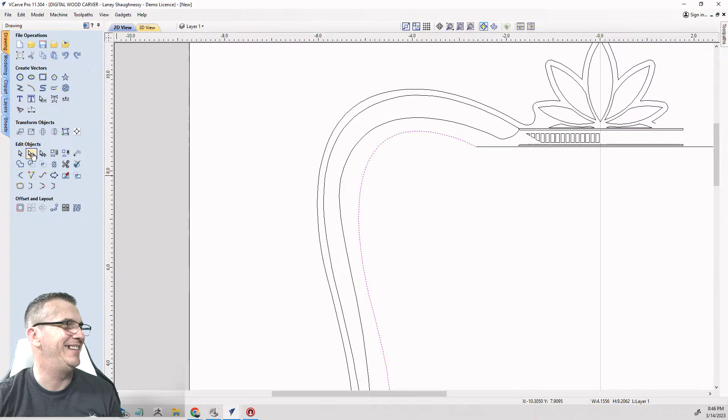Let's, on this line here, oops, hold on. Always, when you click preview, click OK, don't hit cancel like I did. But I want to fix this shape.

And I want it to just start kind of getting thinner as it comes here. All right.

So with that, now I want to select everything. Is it not going to let me today? This, and that. I want to kind of grab all these anchors here. I'm going to use my right arrow key, and I'm going to just kind of extend them up and over a little bit.

All right, that'll be good. All right, let's get the other curve drawn in. Now, there's going to be an S curve. All this is going to join together with a cool little, kind of like a little ball type of thing.

But on this, I'll use the curve fit tool. We're going to have a curve that kind of starts, pick a spot right here. It's going to come kind of... here, let me do this.

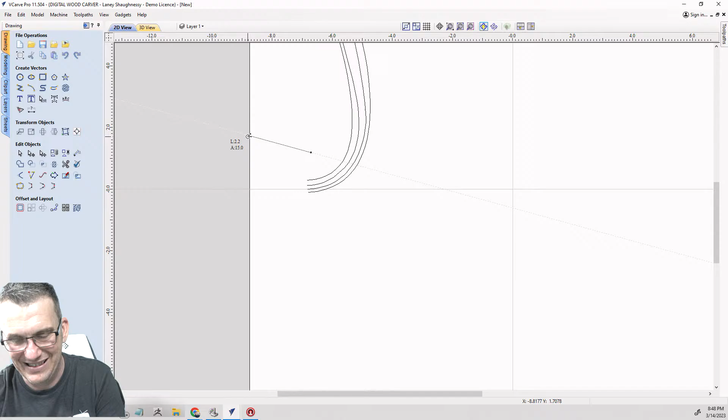I'm going to make life easy on myself. I'm going to get rid of this line for a minute, leave it just like that, and this line for a minute too. I'll put them back, don't worry, I'll use offsets and all. But I need this right here so I'm not crossing over four lines every time.

I want to take my curve tool and right about here, somewhere right here. I want to come down and kind of cross these two, so it doesn't have to really be straight, but just somewhere across these two. And then I want to come a little bit further and start working my way back. I'll clean up these lines in a minute.

And I'm going to stop right there. Spacebar to finish. Now, got a lot of cleaning up to do with this one. Node editing mode.

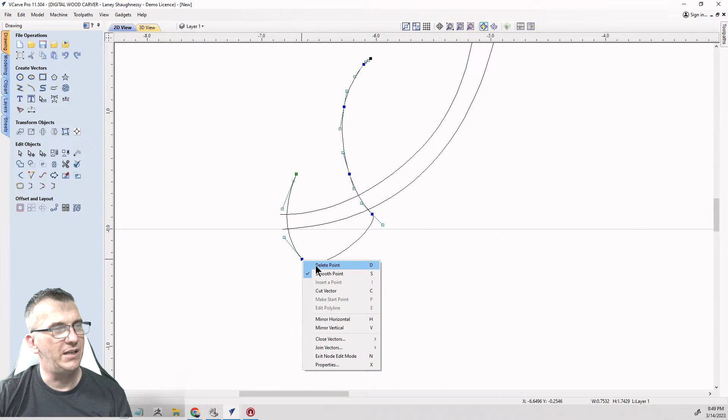I want this curve to be a nice smooth curve all the way to here. So I'm going to remove this point here, and this point here. And I'm going to pull this down, and pull this down. I want it as kind of somewhat as bubbly as I can get. I want to get rid of

one, just kind of a, not a teardrop, but just a nice arc. And I'm going to use my right arrow key to pull those over. Delete that point, delete that point. I love going from point A to B when I can.

Okay, now this line here gets offset, and it's going to get offset... again, if I'm standing there looking at the line, inward, offset inward. So we're going to go offset inward, and I want to go an eighth of an inch - that's good, perfect, good, good, good. And again, I want to be wide. And that offset, you know, that's that.

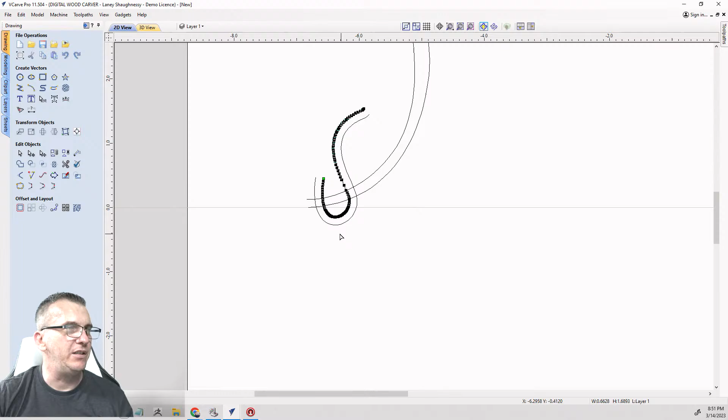Let's do that curve fit tool. Okay, I want to be kind of wide. It's ugly - it looks good when it's all done, I promise. I'm drawing the arcs and all. Get rid of this point.

I hate that point right there. Give me a second, that point is making it flat. I need a point that's going to work with me.

Bear with me, ugly sucker. I'm torn, bear with me a second. Let's go. All right, I'm going to leave it just like that, I'm going to call that good.

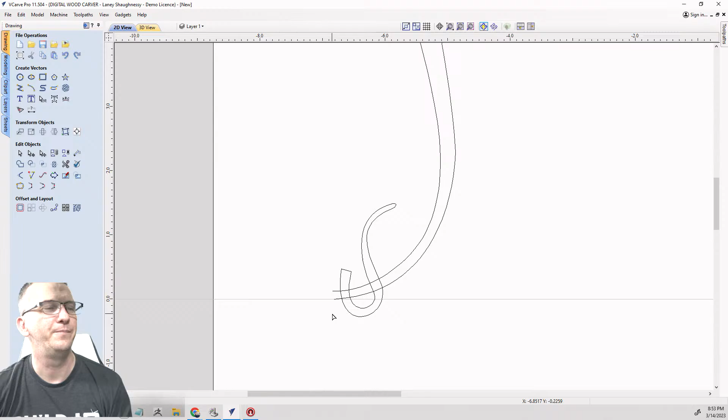Okay, all right, and then I want to take a circle and I just want to kind of draw a 1/2 inch diameter circle right about there.

All right, let's do some trimming and kind of clean things up, and then we'll do some offsetting and all that stuff. So let's trim. On this trim, remember my center line and stuff, I really want this above the center line, because I'm going to be mirroring about the center.

So bear with me a second, guys and girls. I really need this curve to be more dramatic. I'm sorry, ladies and gentlemen, bear with me, I need this curve.

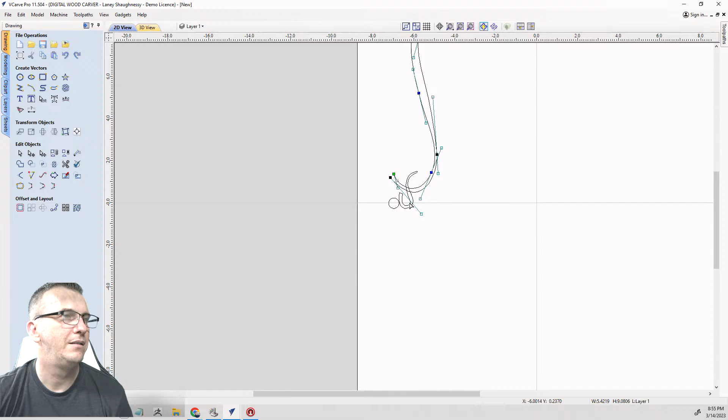Okay, good. All right, now I got to move this up into place. This goes here. I need just that little bit to be on the center line, because when it mirrors over, I want two of these connecting kind of right here at the curve.

So I can now bring this one down just a little bit, this one down just a little bit, fix the curve a little bit. Okay, I'm not going to fiddle with it no more. All right, that's it. Okay, so one more time.

I need this line to come back. And I'm just going to trim this line. I don't want to do that again. Cut the vector right there and delete this span. Okay, Jesus, all right.

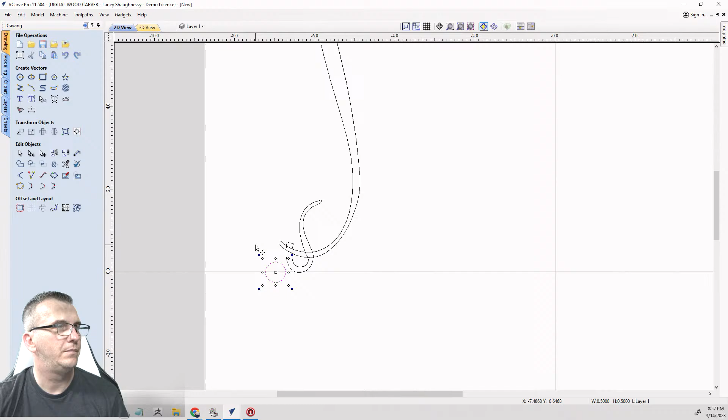I will get it here in just a minute, ladies and gentlemen. That's what I'm trying to do. Okay, that's fine. All right, let's get this circle into place.

And let's do some trimming now. All right, one more time. So we're going to take this, that, and that. This, and that. This, and that, to combine that together there.

Up here, we're going to fix this. It needs to be a straight line. So node editing, this is going to be a line. Okay, and I'm going to be fine with all of that.

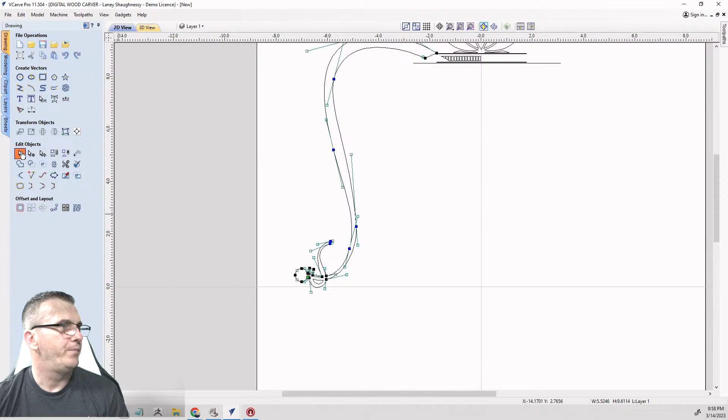Now, as a whole, I'm going to select all of this and offset it outward by 1/4 of an inch.

Okay. And then in node editing—no, not node editing, sorry—in the scissor tools, this bottom line trims with this line. So get rid of all that. This top line, get rid of it, it's nothing. Get rid of this top line, that's nothing.

And that's it. Wonderful. Holy jeez, that took forever to get there. Sorry, ladies and gentlemen.

All right, now we're going to cut this. I'm going to draw a line straight down from here to here, and I'm going to get rid of everything on this side of the line. Okay?

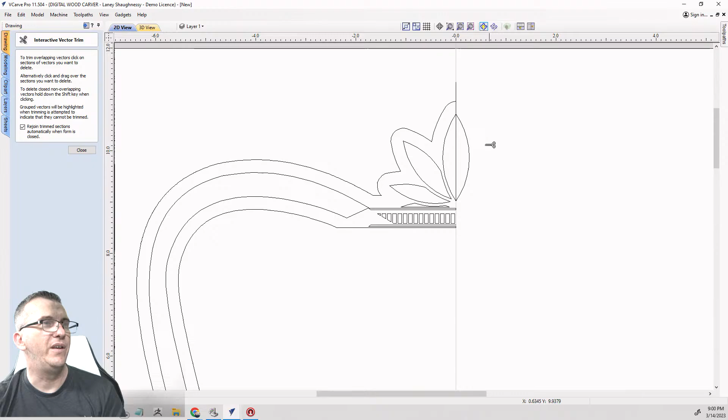So get rid of that. Now this one won't trim. Bear with me a second. There we go, about to say it wouldn't trim for a minute there.

Now I also want this line gone, that vertical line. So node editing, delete this span. Okay, I want that line gone. Over here, anything below the center line, I want gone. It'll make things easier for me to connect.

So imagine if I have a straight line here, right? Imagine if I have a straight line here. I want to trim everything below that line away. So everything below that line away. And I also, in node editing, I want to delete this span.

Now, let's make sure my line is centered. You see how when I drew that line, it wasn't centered at all? I thought it started centered, but no, I didn't. Let's make that be more specific here, on that line, that center line, straight across. I don't care where you stop, just make sure you're on that center line.

Scissors, trim, and after I trim this, we're going to look at the questions before we do anything else. Let's go here, here, and here. Node editing, get rid of this little span right there and get rid of the span here.

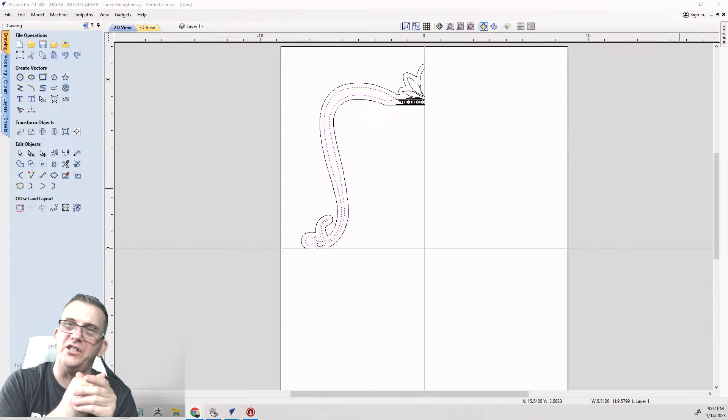So long story short, we have this lotus kind of Victorian frame wannabe thing here. I'm not sure what it looked like originally. I kind of want these curves to be a little wider, but we're good, we'll call this good here. And if I wanted it to be wider, I could expand my straight lines and shove everything over to the right a little bit, which I'm actually going to do.

Hold on a second, we're going to go to node editing. We're going to select everything, all of those nodes, all of these nodes, this node, and that's it. And I'm just going to use my left arrow key and shove that to the left. I'll be happy with that.

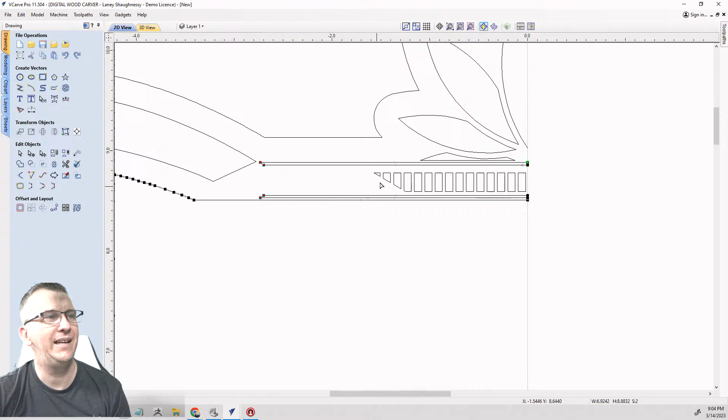Now since I did that, I'm going to take these two objects and use my left arrow key to bring them over, about like that. I'm going to take this object since the shapes are already there—we don't need node editing for this part. I'll take these objects and use my left arrow key to shove them over, kind of get them in line somewhat with that.

Think of a virtual straight line running from this point down. Right? So let me back them up a little bit.

Now I'm going to take this shape and remember my offset, or my kind of array tool. I don't need 50 of these bad boys, I just need 10 of them. I'm going to keep everything the same, but just create some more, right? Let's go 12, 12 of those.

Okay, now I've got one that's going to fall right on the center line, right? So here's what I'm going to do. I'm going to change my shape just a little bit. I'm actually going to move these over, and I'm going to split the line on one of these. I'll just split the line on this one. So what I want is the center line—I want that to be on the center line, right? So when I grab these to move them, if I grab them on the center line, I can move them over and snap them over. Okay, so that'll be on that center line.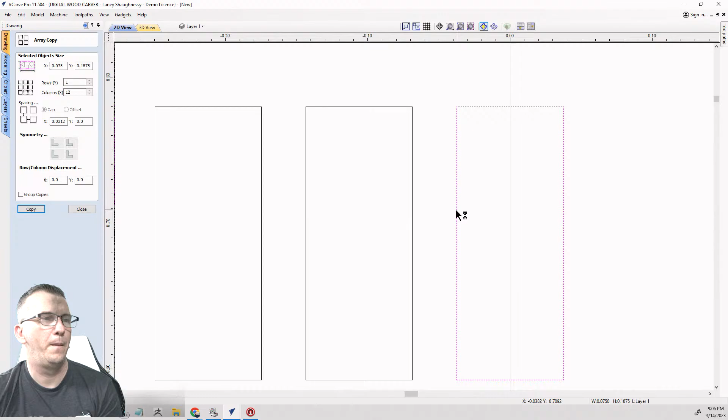Oh, still missed it, still missed it. All right, here we go. Select, find the center, drag. So drag and snap. Are you going to argue with me? Now that's centered. Okay, and that's fine, I'll be happy with that.

Because I'm going to go to node editing, and I'm going to cut the vector right on this center line, and down here. I'm going to delete that because remember I'm mirroring it over, so when it mirrors, it'll create that whole one the same size.

All right everybody, here's where the magic takes place. Let's see what we created. Let's do this—and so hold down your shift key when selecting more than one node. Yes, anytime you're selecting more than one item, you hold your shift key down.

I've been wondering how to grab odd nodes and stuff like that. Yeah, so the shift key when you're selecting more than one item.

All right, let's take this bad boy and mirror it. We're going to create a mirrored copy, flip about object center. We're going to first mirror it horizontally, vertically, horizontally. Okay.

All right, and there's our shape. Now we have some open vectors we have to contend with. So let's select everything and go to the join tool. You'll see that we have 120 closed vectors currently, and 20 open. Now we'll be able to close 7 of those, to make 127 closed, but we're still going to have 2 open vectors to contend with. That's fine, so we'll go ahead and join those.

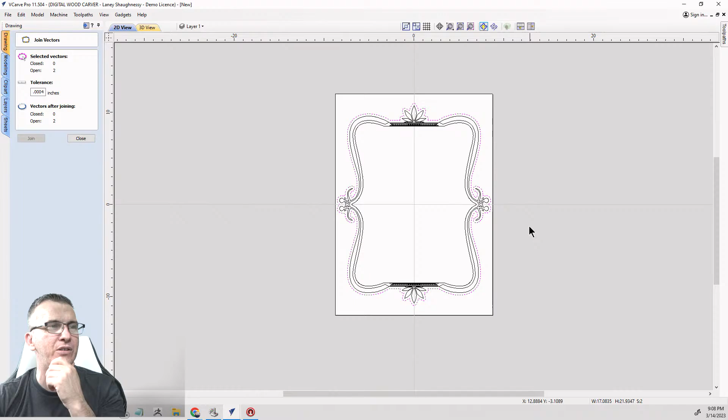Now I'm going to right click on the screen and go select all open vectors. Those open vectors are here and everything. So where they are open, you always look for the green nodes, right? That'll tell you where you're open, because the green nodes represent a start point, the start of a line. So if I come in here and go into node editing, look for the green node, right?

And so basically the lines crisscross one another. So if I go to the scissor tool there, I can trim that away. I still have to do the same thing over here on the other side. Zoom, zoom, zoom, zoom. What's good for the goose is good for the gander, one side and the other.

All right, now I should have 128 closed vectors. All right.

Now let's V-carve this so you can kind of see, you know, this could be built into a shape or a model or this or that, but I'm just doing it as a V-carve. Let's say that there was some kind of nice little quote or phrase or something like that in there.

Let's see here. Since y'all are happy that I'm finished, let's do a quote on happiness. And let's go to motivationals. Let's see here.

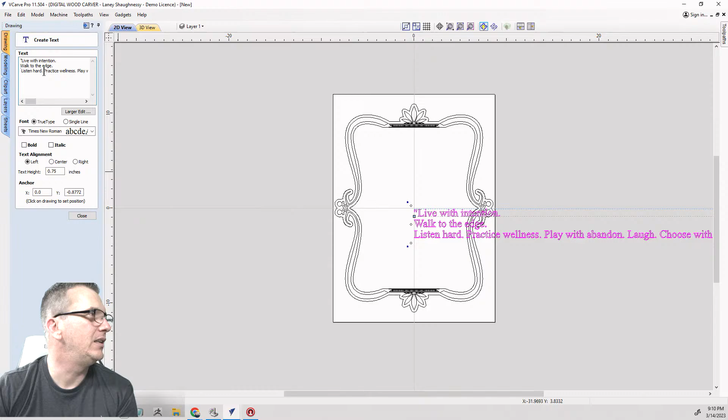Live with intention. Walk to the edge. Listen hard. Practice wellness. Play with abandon. Laugh. Choose with no regret. Do what you love. Live as if this is all there is. Mary Anne. Let's finish off her quote.

Mary Anne. All right, let's get that centered. And we'll bring that down to 625. All right, let's get that on the board here.

And I'm going to close this for a minute. I'm going to size this up. Pull her down. Bring this in just a little bit. All right, let's get that centered on the board, aligned to center.

Let's pretend that this is our quote, which it's not, but let's pretend it is. Thank you, Mary Anne Roadacher-Hershey, for this beautiful quote that we're using in this lesson tonight.

But we're going to go ahead and select all of this, and we're going to do a V-carving a couple of ways. Okay, so we're going to do a V-carve with no flat depth, carve, skip, carve, skip, carve. We're going to use a 60-degree V-bit, no end mill, and we're going to calculate this cut.

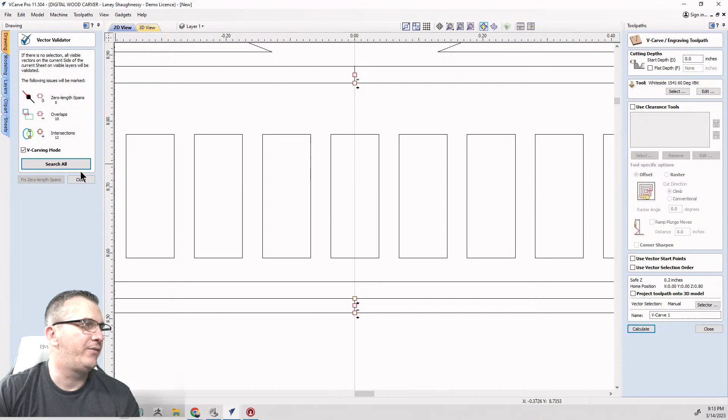So first off, we had some issues with our vectors. So let's see what they are. We have some overlaps in our lines. I forgot to trim the line that was there, right?

So let's fix that real quick. Is it going to let me? Is it going to let me? Are you going to let me? Let me see here.

Node editing, delete the span. Node editing, delete the span. All right, this one down here too. Node editing, delete the span. Node editing, delete the span.

Now, if what's good up there is also the same down at the bottom, right? So we've got to get rid of it there too because I didn't trim that line. I should have. Delete the span. Delete the span. Up here too. See, when you forget one thing, it makes you have to do extra work.

All right, let's select and join. We just cut those vectors. That didn't—just because we deleted the span doesn't necessarily mean that we joined them. There's still 4 open vectors, right? So we've got to join them to close them off.

Let's recalculate that toolpath. That's what the warning was that shot up. All right, so preview the visible toolpath. Let's see what we've created here. Who knows? Now I'm also going to check if there's a vector missing as well. Okay, so there's not a vector missing.

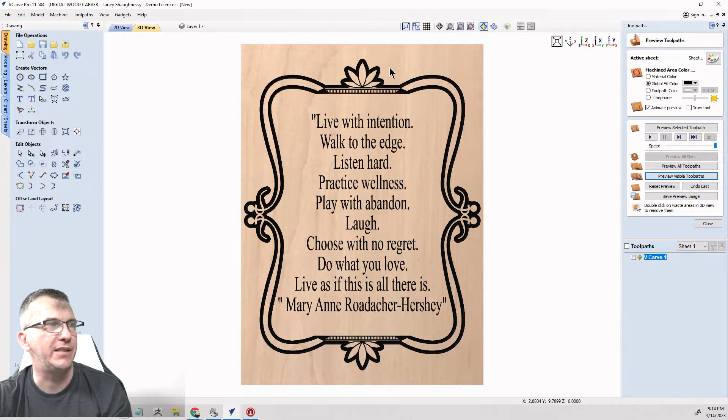All right, so remember, now let's go look at the 2D view just for a minute. And let's check off the toolpath and go to solid view. I want you to see what I was verbally and visually describing.

So a V-carve toolpath cuts between the first 2 lines, skips the next 2 lines, cuts between the next 2, skips, cuts between the next 2, right? Which is our letters and stuff. If I would not have had this outside line selected, it would have carved here, skipped here, carved here, skipped the letters, meaning it would have been raised up. Right? So you'd have had that raised design and everything.

So let's look at this as a whole. Just kind of, let's zoom in. Let's turn the color off for a minute. So we have kind of this little pattern with our little lotus leaf on the bottom and the top and all that jazz.

Now we're going to finish it up, the final. We're going to take this and we're going to offset outward. I think I can go 1/4.

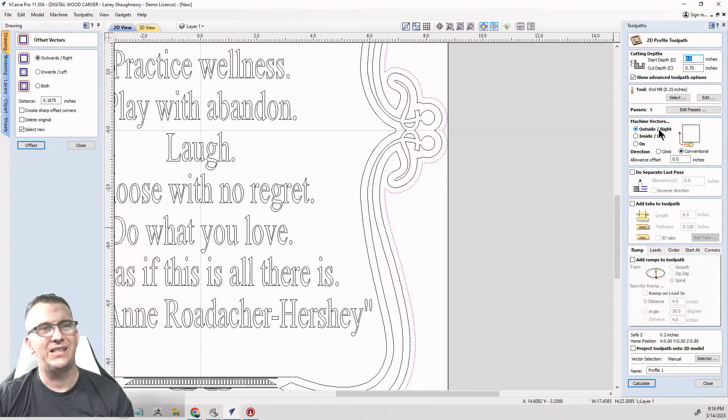Oh, just under. Let's go 3/16, that's 0.1875. Okay, so 3/16 gets me there. Hold down that shift key, hit delete to get rid of all the other offsets. I just wanted this outside line because we're going to do a profile cut, cutting all the way through our material with a 1/4 inch end mill on the outside of the line. I'm not going to add tabs for preview purposes.

So this design could look good up or down, straight up or down, or vertically or horizontally. Let's add some color just to give it some character so you can see what's happening and all. And that, all in all, is how you would create a decorative border.

That was a long way around, wasn't it? But basically, we use the curve tool, the node editing tool, the rectangle tool. We used the array tool to create the array of those boxes across the top. We used our offset tool, and our fit to curve tool to get rid of all those extra nodes.

It may not be the best looking design, but we created somewhat of a decorative border frame. This could have been any shape, including the lotus. Hopefully you got a kick out of that one. We created a decorative looking frame with the use of our offset tools, our node editing, our array tools and join tools and trim and scissors and all of those things that we utilized to get this, right? This end result.

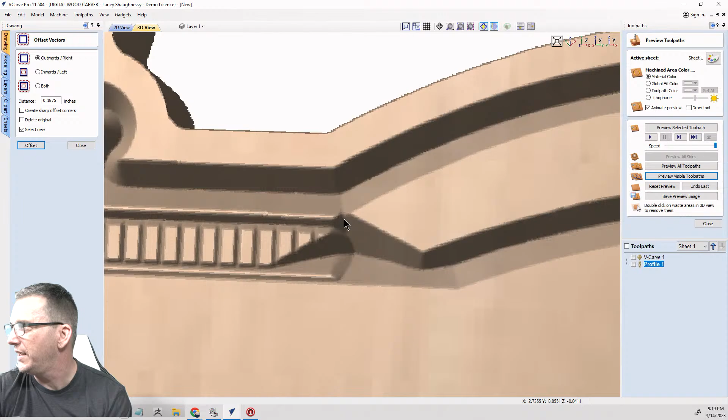Now, there is one thing that I see that I would do a little bit different. Let's zoom over here. Number one, the trim on the squares, I'd probably bring them a little bit closer and not trim so many. Number two, I would widen this square - remember the two little squares at the top and bottom? I would widen this square, connect it to this, so this arc, when it comes down, it'd actually be just a joining row. There wouldn't be a gap right here. And then I would actually get rid of this lower one.

So if you saw that in practice, and this is the last thing that we're doing, then we have to say goodnight, ladies and gentlemen. What I'm saying is I would do differently - I would come in and take those two away, and those two away. I'm going to take...

Let's see, these two are trimmed, right? So I'm going to take these away for a minute, leave them right there. I'm going to grab this guy and array him over a little bit more. I'm going to go 5 over, delete what I don't need. One more, man, one more - let's go 6.

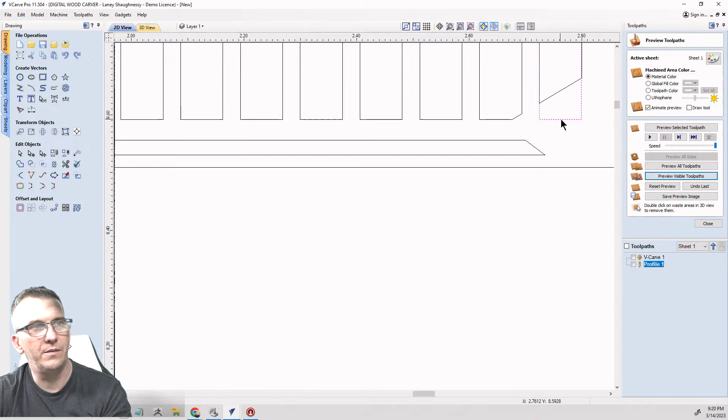Yeah, all right. These two will replace these two. So I can delete the 2 that I want. I want that cut there for a reason - I don't know, just something.

All right, let's get rid of this. Let's take this - mirror, copy. Create a mirrored copy, flip about job center, flip horizontally. Okay, to create that over there.

I'm going to get rid of all of these at the bottom, because we're going to copy down. These boys and girls are going to get moved down. I'd come down to right about there, and I would make them a little bit taller - not much, not much.

Then I will mirror those, flipping them vertically about job center to put them back down here. And then I would take this shape and I would widen it up. Drag it over.

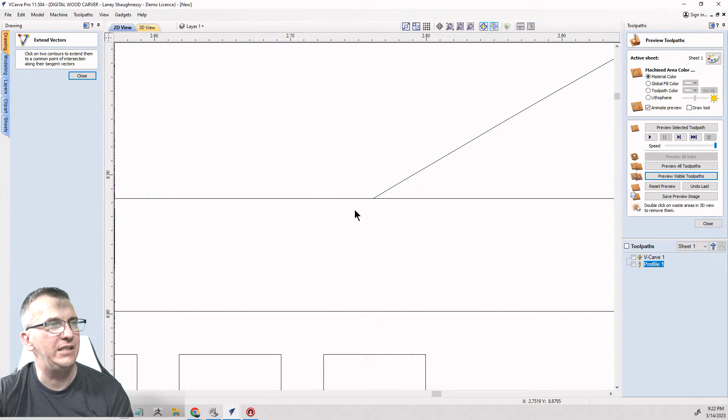I'm going to go into node editing, delete the span of this line here for the moment, and use my extend tool to extend this line to here. Then I'm going to take my line tool and draw that line back there. I don't want this one to change right there. Then I can use my scissors and connect that together right there.

I could almost see this being like over and following that angle a little bit, right? But forget it for right now, we'll just go with this.

Now over here, same thing - node editing, delete this span, extend this line to here, draw a new line from there to here, and trim this and this, connecting that together.

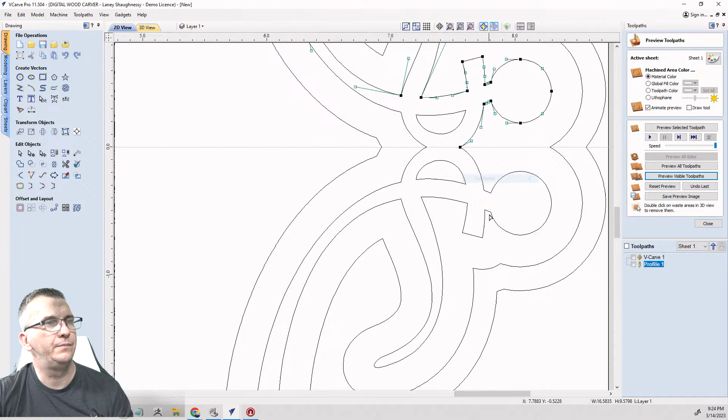Okay, again I don't want to repeat what I just did down below. So we're going to take node editing, cut the vector here and here, cut the vector here and here, delete that, delete the rectangle, delete that, select this since it's all going to be joined together in a moment, and copy, mirror, mirror, flip it vertically. That way I don't have to repeat all that stuff.

All right, let's select everything, go into our join tool. We have 4 open vectors. When we hit join, they'll all be closed again. And then I'm going to re-carve this design. Calculate.

Nothing's changed with my outside profiles and my offsets and all that stuff, so I don't need to change the profile. But I do want to change this because I think it would just maybe look better. And that's it, right?

So now we have something saying that it's going to cut through, right? So there is something. Select all open vectors - there's no open vectors. Select all duplicates - there's no duplicates.

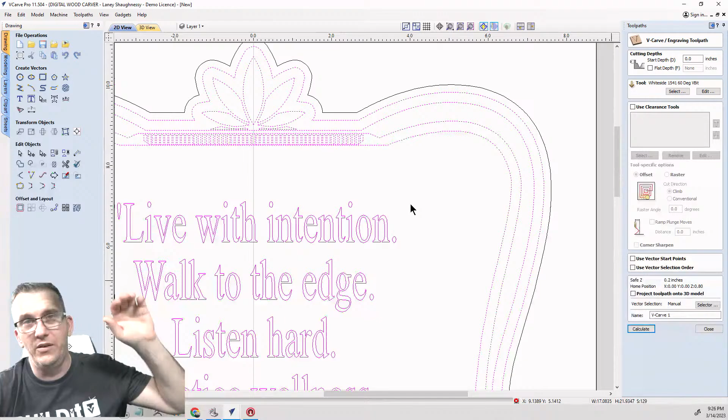I've got that extra profile. Remember, that's my profile, and it needs to be turned off because I made that addition of that extra offset for the profile cut, that 3/16, and it does not belong in the V-carve toolpath. That's for the profile cut only. So what was happening was it was saying, hey, you're about to cut all this all the way through your material. So now we can preview all the toolpaths again.

So I had that new offset for our profile selected when it shouldn't have been. All right, so what this did basically is it just kind of created a bit of a joining, if you will, when it's finished carving.

And if we come in here and look, we'll add some color in here. But basically, it just kind of closed off that section in there. And again, this dentil tooth design would look much better if it went all the way over and the tops were trimmed of the rectangles to match this arc. So if those continued over to right about here, and those match there, it would look better, right? But you get the idea.

So that's it, right? With all that, don't forget to save, right? Somebody said don't forget to save. Always save early and save often, and I'm terrible about that. So we'll save this. I've got so many files that one of these days I got to go through and organize them. In our downloads, we'll call this our Victorian frame.

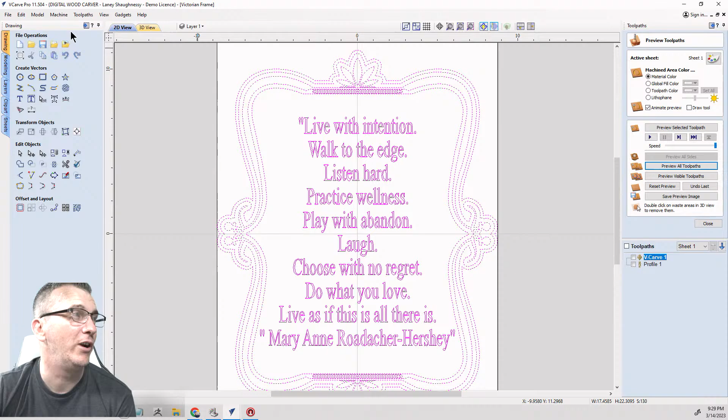Now the vector's not the greatest and all. If I clean this up and put the dentil and all the angles and stuff over there, if y'all want this vector of this Victorian frame, you can let me know. But this... I don't know, it's not the greatest in the world, but it's something. It's just a combination just to show you curves and arcs and circles and node editing and all that wonderful stuff, right?

All right, so let's see if what I missed in the chat here. So hold your shift key when selecting nodes. Yes. The straight rectangles were close to the top and bottom. When you started flipping, would they cause any issue? So I moved them down closer to the rectangles here, closer to this lower line.

Let's add the color back in there so you can see. So this black line kind of right down here and everything. So I could widen that top line up so I can connect it together to those arcs and everything. So no, there would be no issue caused by that, Jerry, at all. That's what I was talking about. There you go. Let's see here.

Let's see here. Hey, Crystal, how you doing? Good to see you. I'm sorry I'm catching up late on the chat here. Great class, any questions, everyone? So, did I miss any questions? Everybody I saw with question marks, all the questions were pretty much answered.